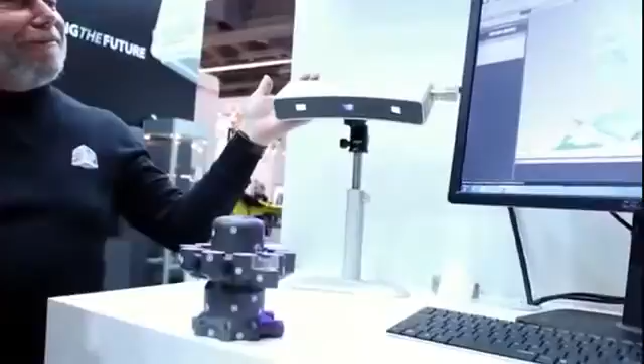So if you want, I'll show you a quick demonstration of how it works. Go for it, show me how it works. So we take a part, we put it on the table. You can see the scanner up here in the background on our nice stand, and there's actually a blue light being emanated, with a pattern projected onto it. When we click scan, you'll see a pattern of stripes or profiles projected onto the part.

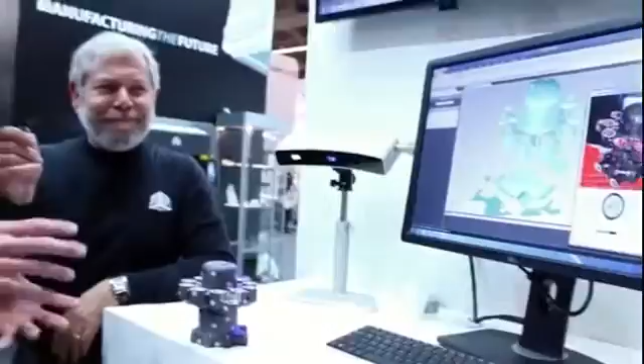From there, it processes that into a point cloud containing anywhere from 30,000 up to 1,000,000 points for every scan. The nice thing is the ability to automatically register and align on the fly, so the user doesn't have to—using a lot of the geometric feature-based recognition that Geomagic's known for, which we've been developing over all these years. The net result is the user's able to collect all these scans and do inspections against an existing CAD file or create a new CAD file from scratch.

And it fits directly into my CAD package. It does—we have plugins directly into SolidWorks as well as SpaceClaim, with more coming on the way. We also have a complete suite of software tools like DesignX and Studio if a user wants to do that completely within those tools.

And what would this run me for, Kevin, if I wanted to put this on my desktop today? This comes bundled with software—it's not just a single scanner, it's a solution we're selling. It comes for $14,900 US for the SolidWorks implementation as well as the SpaceClaim implementation, and it goes up from there. We also have packages with the inspection software as well as Studio and DesignX.

So powerful, integrated, ready to use, seamless into my CAD—I can begin to take something as complex as this, and it could be in my SolidWorks CAD in 20 minutes. 20 minutes? 20 minutes. Yep, done it myself. It's an extremely easy tool. You heard it here, folks.

This one is really at the heart of our entire 3D printing 2.0 journey, because it's one of our production grade systems that makes real thermoplastic ready-to-use production parts. And it's possible because of our completely new state-of-the-art Pro X500, which is a next generation selective laser sintering, or SLS, machine that is faster, more compact in footprint, more accurate, and can run as much as 7 times faster than any other alternative thermoplastic manufacturing platform.

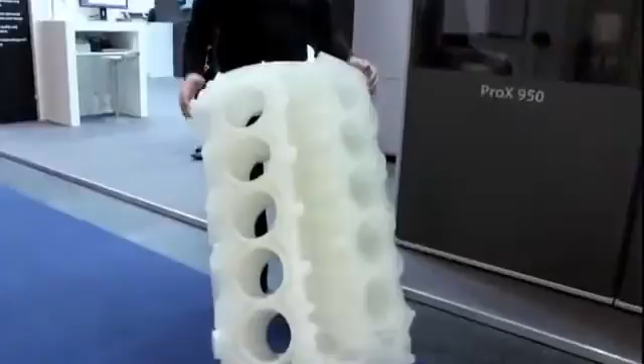This happens to be a QuickCast pattern for an engine block that for the first time can be done with complete accuracy in a single piece.

The Pro X950 uses a completely new technology that we have in SLA, which is the polyray technology that allows us to begin multiplexing numbers of rays to speed up the manufacturing process.

It's the greenest machine that we have because it uses material very efficiently, generates very low waste, and gives the most incredible finishes and surfaces with an accuracy that today rivals CNC machining. It's one of the most reliable manufacturing grade systems, and it's ready to be deployed on your manufacturing floor today.

I give you the Pro X950 at Euromold 2013.

So there are lots of direct metal 3D printers on the market, but there is only one Pro X300. Let me explain what I mean, starting by showing you that this is such an industrial grade machine that I actually have to stand on a little step to be able to look into it.

What's unique about this machine is that it's the only one of its kind that was designed fully to fit on the production floor. It's an industrial grade machine.

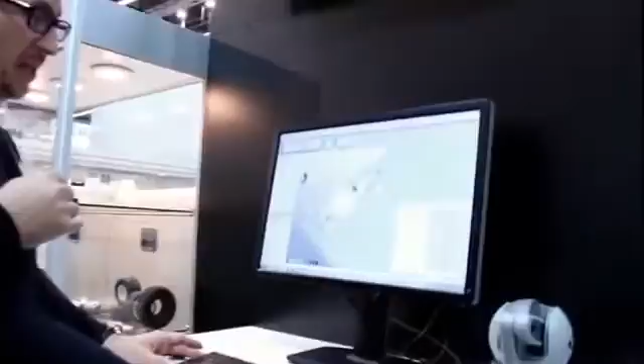So what you want to be able to do is import models, assign different materials and properties, and of course it should be convenient for the customer. I imported this little Formula One model, and for example, you would like the wheels to have a different look and feel, so we want the wheels to feel like rubber.

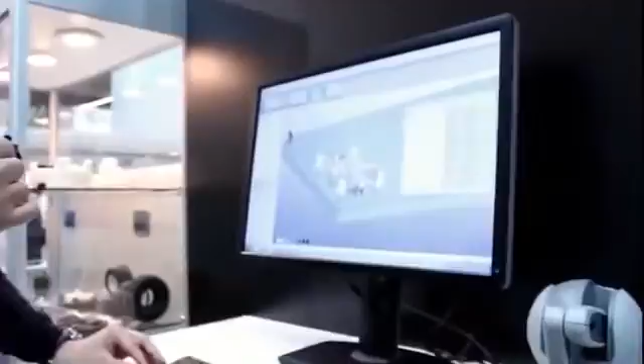How long exactly will it take me to decide that it's going to be rubber-like wheels? You see we have this little material assignment explorer, and we can assign the different material conditions just to that little wheel.

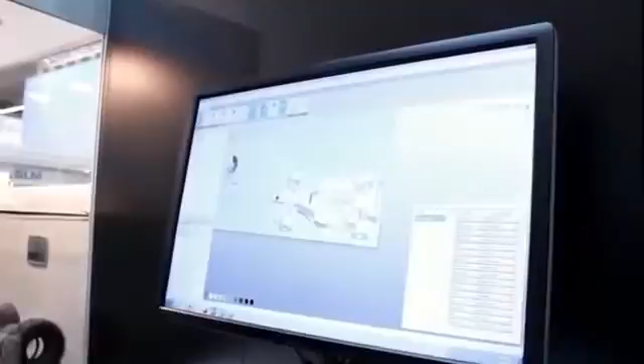When I move over the model, it automatically shows me where I have different entities listed in the Explorer, and I just click on the material to assign a different material to the different entities, just like that. It's drag and drop, and you can assign complete part conditions or just boundary conditions. So you could create something bouncing, still stiff on the outside, or the other way around - you can go from flexible rubber all the way to rigid materials.

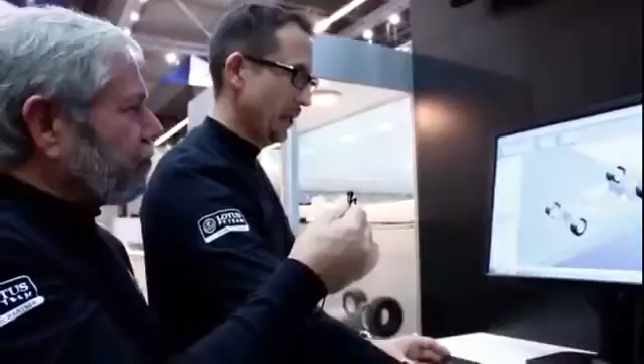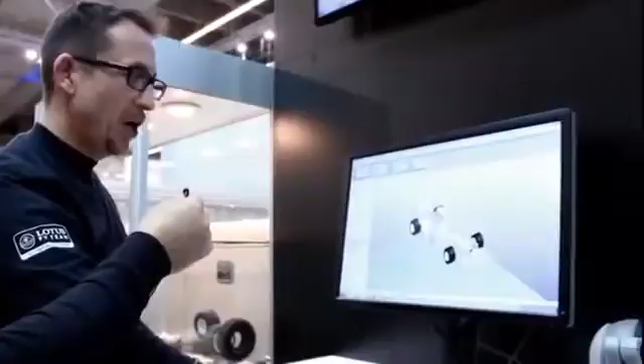You have different opportunities to review your model - you can clip through it. There's embedded file fixing, so if you have a defective STL file from some different source, it will fix it as well. You also have manual ways to orient your parts, but also auto placement, so it will position several parts in a way that you have the least possible building volume in your machine.

So you can optimize the print volume utilization, fix all the files automatically even if you have imperfect files, and assign properties at the pixel and layer level. Absolutely, perfect, thank you so much.

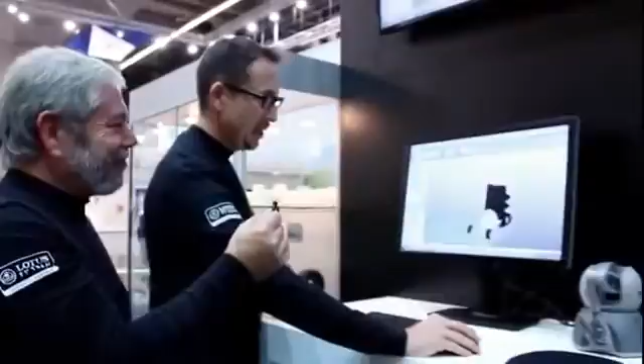I was just importing a couple of files. Obviously they all come in at the same position. If you click on auto placement and OK, it will move the files in a way that you wouldn't be able to do yourself in a quick way. Just have to wait a second.

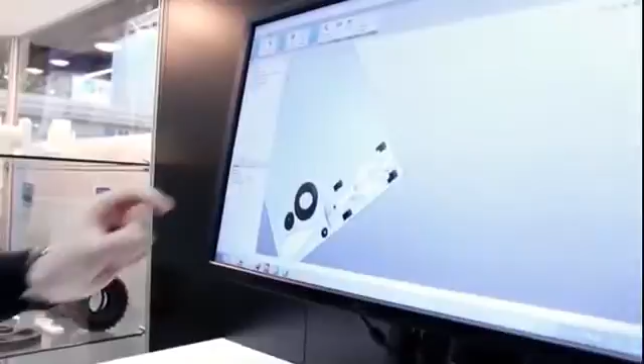A little bit of calculation time - there we go. If you look from the top, you can see there's enough space in between, but it's the least space it takes to produce the parts in a convenient way. That is really exciting, thank you so much.

So we're continuing the series of reimagining the engineer's desktop, and I'm here with my buddy Josh, who's going to show us a few new tools that really allow us to mash up different inputs and begin to touch and manipulate designs in ways that engineers could only dream about. And now it's all a reality, becoming increasingly easier and simpler to use. So what do we have here, Josh?

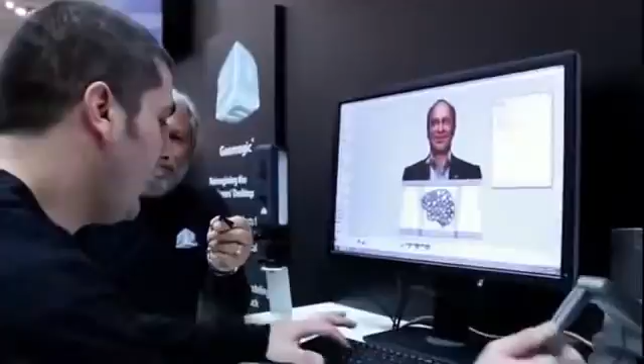So we have the Sense scanner and the Touch X haptic device. There's this digital thread going through all the workflows we're creating now, so I can start with the scanner. Well, so you've got my friend Ray Kurzweil here. Yeah, I have a mini Ray here, and we took the cover of his newest book, How to Create a Mind, and made the logo using haptics.

So with haptics I can use the Touch X to touch and feel the data. When I touch the tip of Ray's nose here, I can feel that. And the nice thing is I can also go in with color and spray paint it, just like I was actually using an airbrush. I can choose a color, select it if I want more of this color, and begin to spray it on the surface.

And all of this data was collected using the new Sense scanner, which is right here. Typically we use it as a mobile device, but you have it on a stand - why is that? Well, like you said, reimagining the engineer's desktop. So for me, if I can start with the scanner, maybe even have some gesture recognition, the Touch X haptic device, and the freeform software, I can pretty much create anything, especially in the realm of complex organic manufacturable parts.

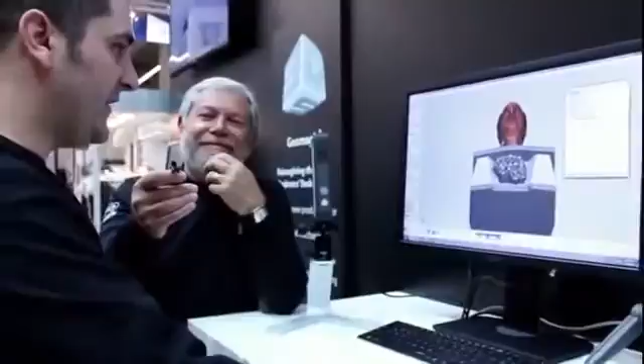So how long does it take you to scan this dude here? To do something like this with the base, maybe about 30 minutes, and then the cleanup, but definitely less than an hour - it depends how far I want to take it. You can spend 10 minutes or 10 hours. And before Sense and Touch X, how long would it have taken somebody as expert as you to do this? Well, I've never been a particularly good portrait sculptor, so it would take me - and it wouldn't look as good - it would have taken me a day at least.

So from a day to 30 minutes to an hour, as we reimagine the engineer's desktop right here at Euromold 2013.

Yeah, it's a really exciting time. Thank you.

I want to talk to you about another big building block in our 3D printing 2.0, which is what I call cloud sourcing and cloud manufacturing. So we used to have...

Onshoring and offshoring and outsourcing, and I want to talk to you about cloud sourcing using our global network of Quick Parts services. Quick Parts Services is operated with the latest 3D printing, advanced manufacturing, and traditional methods to supply you with all of your design to manufacturing needs and to multiplex your own internal capabilities.

Every time you need or desire to have some quick turn, short run, real manufacturing applications, including very high-end applications like this Rolls-Royce engine, which by the way was completely manufactured at our Quick Parts facility using our latest SLA and SLS technology, and shows you complete functionality.